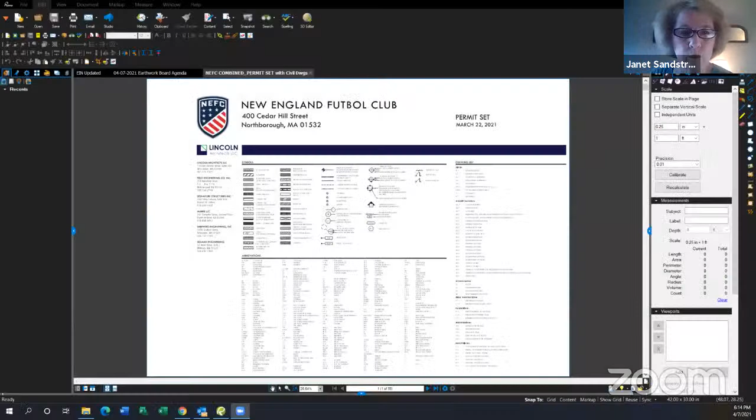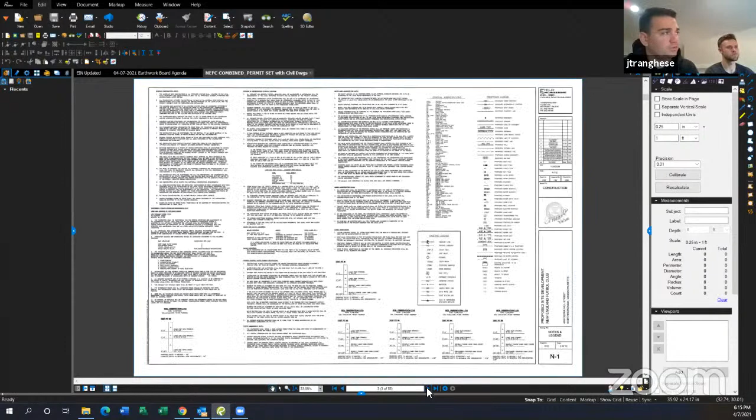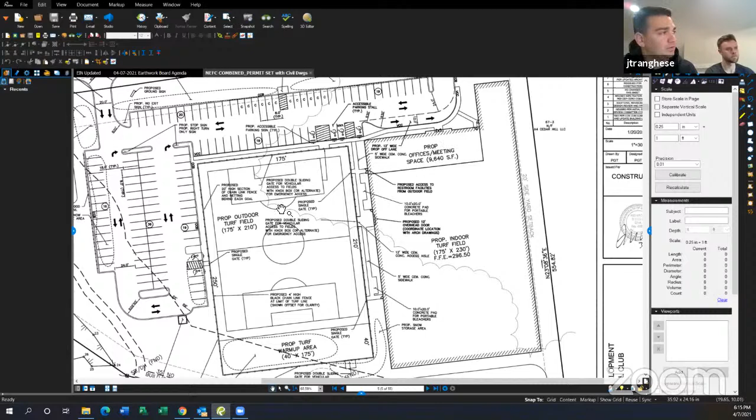Everyone see our screen? Yes. So this project is for the development of an approximately 55,000 square foot athletic facility. The building has a large fabric structure in this area. It has a conventional steel and concrete building at the entry that will host offices as well as meeting spaces. And then to the right of the project, so that would be Plan West, has a large outdoor field.

And then Plan North has a large parking space, both Plan North and Plan West. Where exactly is the building? This right here. Oh, okay. I was looking at the plans and I wasn't quite sure where it was. Okay, so this right here is the indoor field here. Oh, it's an indoor field. Yes, so it's a large fabric building, steel trusses with a fabric liner.

And then it has an accessory building on the front of it, a traditional steel metal framed concrete slab building that has the restrooms, some office spaces, as well as a couple meeting rooms inside. I'll flip to an architectural set to better help explain this. So this is the architectural floor plan. So here you can better see, this is the metal building at the very front. Page left would be the parking area.

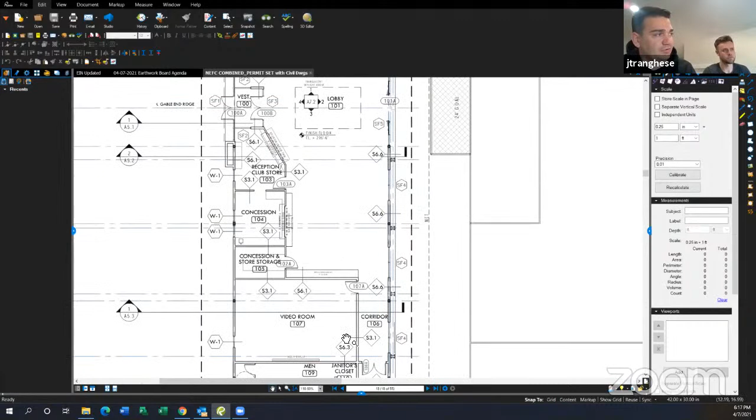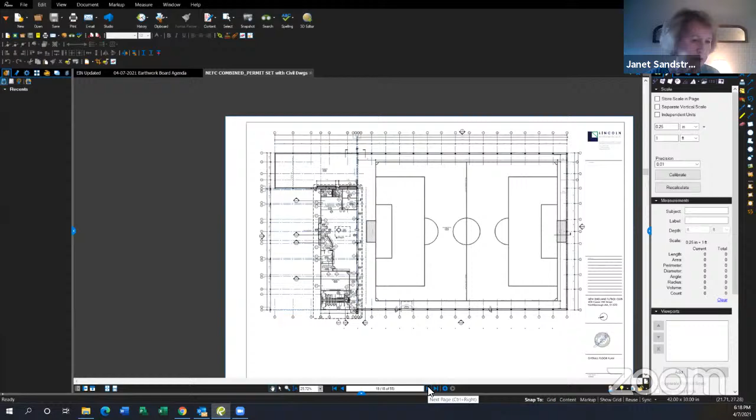So inside this area, there's a large lobby, some very small concession areas, video room, men's and women's room. And then you enter the field in the center of the building, and this is a large indoor turf soccer field. Wow, that's interesting. Now, what is your plans? How much dirt do you have to remove, and what's your excavating plan?

So we've put together a logistics plan that we can review. Give me one moment to pull that up. So this logistics plan has been developed off of the civil drawings. This is the project entry, the proposed project entry. Again, this is the field, this is the outdoor field. So we'll have a construction entrance set up here, the construction exit set up over here at the other proposed exit.

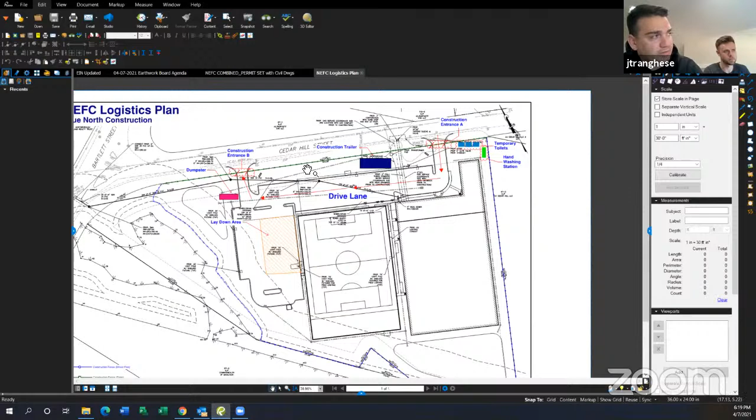Trucking will enter and exit through here. Cedar Hill Street is right off of 495. The entire front of the property will be protected from the public with panelized temporary fencing. The perimeter around the other three sides will be set up with driven 6-foot high chain link fencing. This is actually on site already. All of the erosion control has been established and has been signed off by Mia at the Conservation Commission.

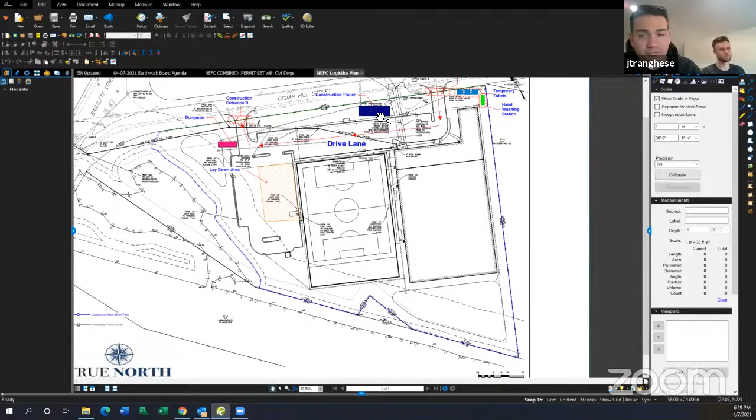This blue square represents our office trailer. We'll have some portable toilets and hand washing stations for COVID compliance here. And then to the far west of the site, we'll have a lay down area for concrete and steel erection, as well as just storing other building materials.

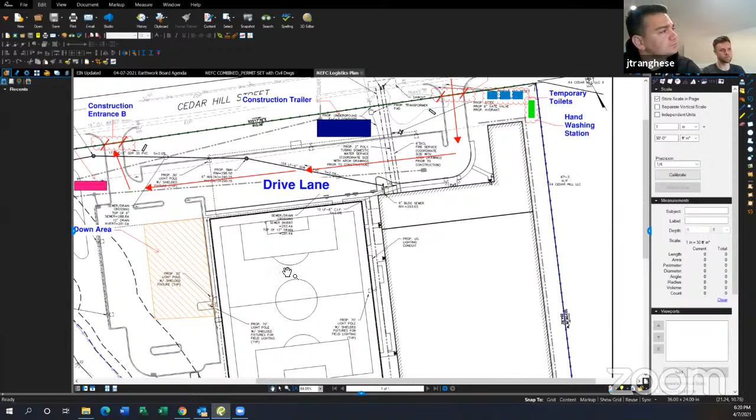Is that fence permanent or just for construction? Just for construction. There's no fence at the front of the site. There's only some fencing around the back of the site to help catch balls around this field.

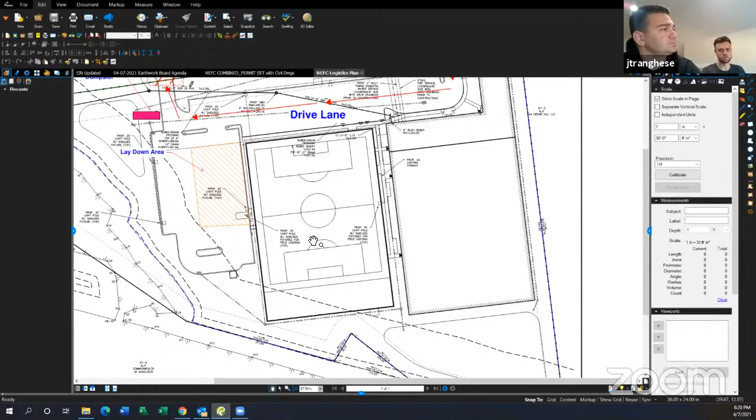How much dirt or gravel or whatever is there, are you going to be, what is it called, loamy sand? So there's approximately a 1 foot forest mat that's comprised of deteriorated wood.

Leaves, loam, and sand. The exact cubic yardage I don't know off the top of my head right now, but our plan is to go in. This is a largely forested site currently, so we'll remove trees necessary per this plan and remove the topsoil in specific areas.

This area here and this area here are large retention ponds, so we'll cut the site down, then we'll establish these erosion control ponds, and then progress with building excavation and foundation excavation.

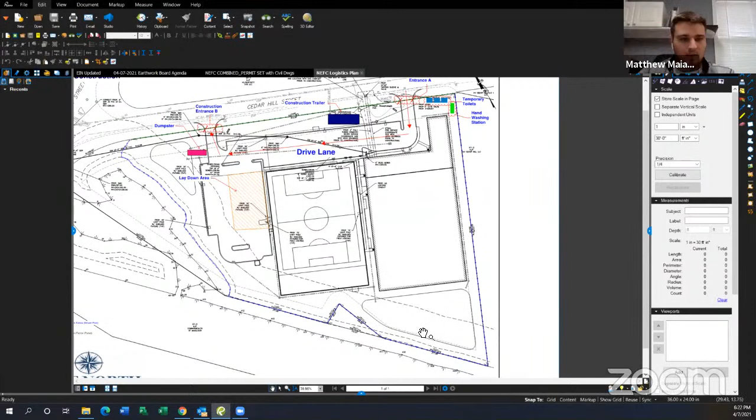Matt, do you happen to have the cut and fill analysis off the top of your head? Hi, this is Matt from Green Acres, the site contractor on the job. I was just trying to look back at what we did for our takeoff on that. Obviously this is an estimate because we don't know exactly what's there for material. We didn't have test pits and that information ahead of time.

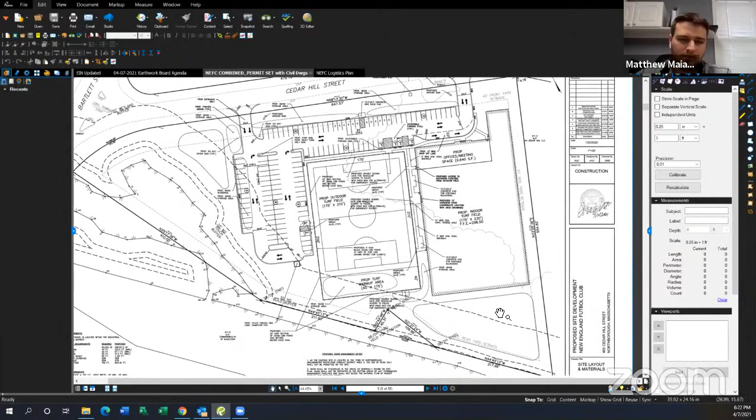I believe we plan on hauling 6 inches of topsoil over the entirety of the site, or the majority of the site anyway, so that was roughly 4,421 cubic yards. And then from the loamy sand area, we had planned on stripping 19 inches over 104,000 square feet, for another roughly 6,098 yards.

Again, those are estimates that were done for the bid, for the quote itself, so it's not necessarily 100% accurate. Until we get in and our layout guy is able to go in and shoot grades and do all that work, we won't know exactly what we're looking at.

Do you know, when you did test borings, what was the level of soil versus sand? I'd have to defer to James on that, we weren't involved in the test borings. It was approximately 1 foot of the forest mat, which contains the loam.

This will be a largely export project. So I just pulled up the erosion control plan. You can see here pretty clearly the property boundaries, and a very large percentage of this site is developed. I think this is just under 6 acres.

This entire area here will be cut down and then brought back up with structural fill, and a lot of the loam will be reused on site around these basins. There's a geotech wetland mix that goes back in the bottom of both of these retention ponds here. And then a lot of the loam that's in this area will be removed and then reused on site here.

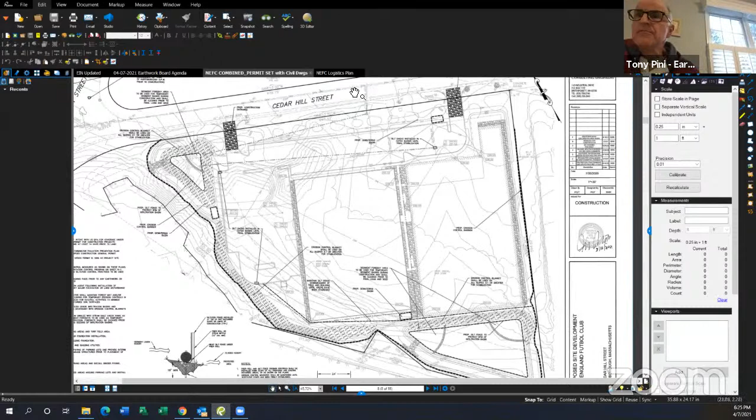Hey there, this is Tony Pini. Can you tell me just generally which way does the topography flow? Yes, absolutely. So this area along Cedar Hill Street is relatively flat. The existing conditions is relatively flat, and then it starts to taper off.

There's a large culvert in the back of the property here, I believe it's property of the MWRA. So about, I would say, 40 or 50 feet before that culvert, there's a gentle slope downward, an average of 10 feet, along this back southern portion of the site.

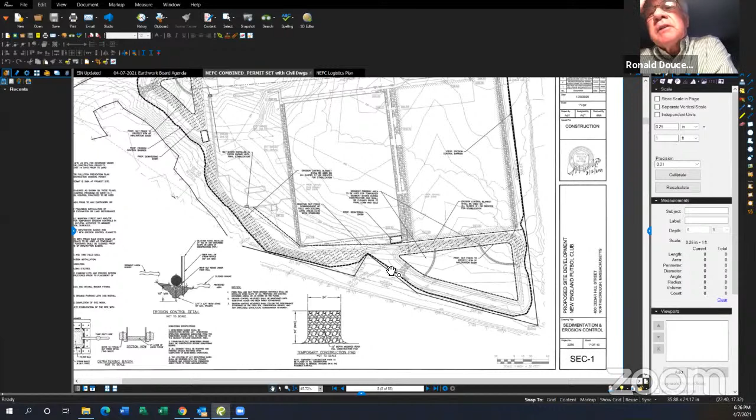So that detention pond is supposed to carry whatever excess comes off the high ground next door? No, the purpose of this retention pond is to catch storm water runoff from this building and divert it into this retention pond.

There's a stone drip strip along both perimeters of both the fields here that gets piped into this storm retention pond, and then this storm retention pond.

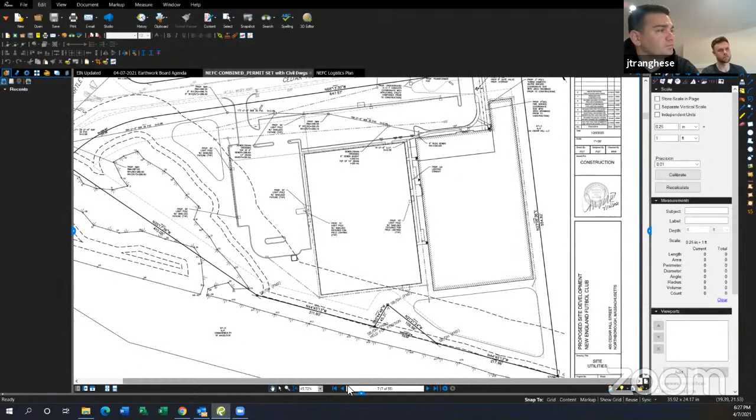Are there any more questions from the board? I'm all set, Janet. Ron? That looks good to me. Okay.

Do we have a bond amount? Yep, 1 second.

Let's see, I did do a bond amount and the total comes out to $28,500. It includes the stockpiling of the topsoil, and then if in the event that the applicant were to walk away, we'd have to hire a bulldozer to come in and spread that amount of topsoil, hydroseed the area. And then there's also the money that we always carry for the as-built plans. So the total, including the 15% contingency that we always charge, is $28,500.

Did you say 28? 28,500. Okay.

Just a question on how many trees are approximately there now and how many you plan to cut down? The whole 80% of the site is wooded. So it looked like there's about a two or three year growth in this area of the site, with trees with a 1 or 2 inch diameter in this area here, right throughout.

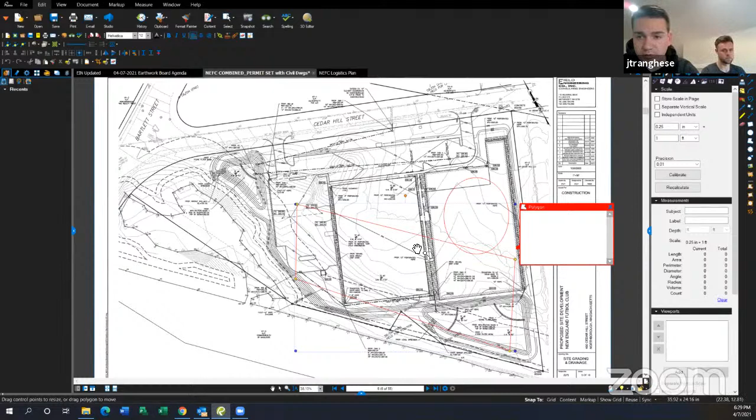This secondary area is truly forested. There's a bunch of large pine trees in that area. An exact number would be very difficult, but it's roughly 100. We've met with the DPW, the tree warden, and received his blessing on that.

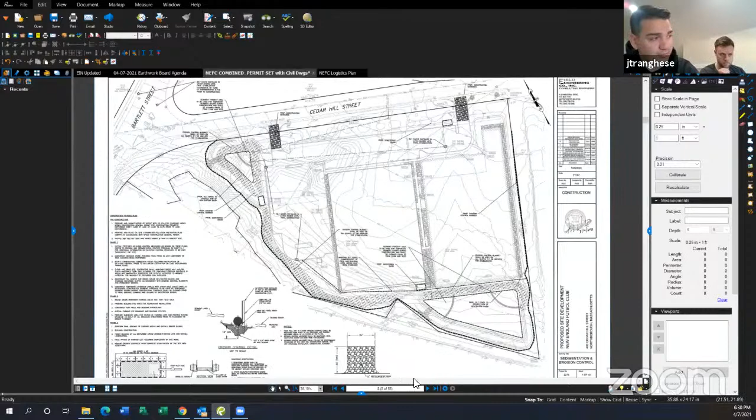So will there be any trees left when you finish, or are you going to plant your own trees? Both, a combination of both. Trees that are not needed to be removed in the public right of way have all been flagged to remain and will be protected. There's also a landscaping plan here that we can review.

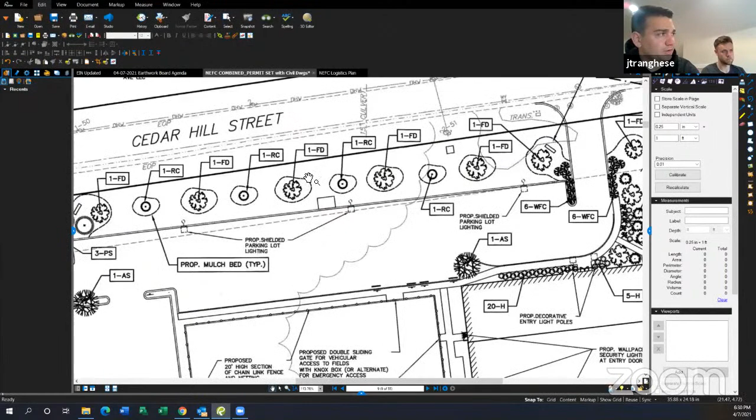So again, here's your entry, and then here's your other entry. There's a large amount of plantings that are going to occur along the street here, along Cedar Hill Street. There's some existing oak trees over in this corner, and then all down here that are to remain. There's also some other sporadic trees scheduled to be installed around the landscaping areas.

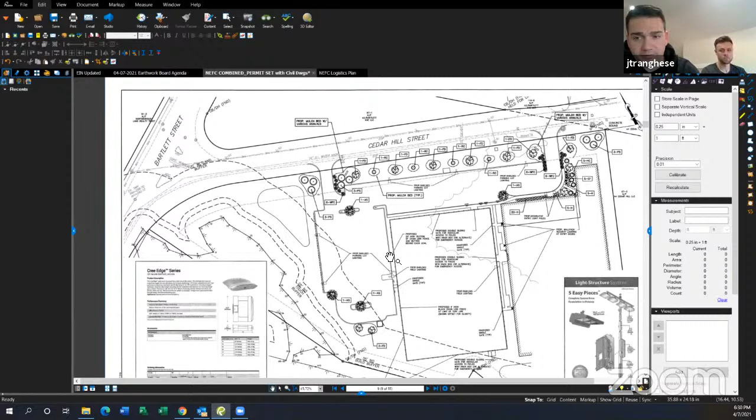I was just curious, how far is your exit that's closest to Bartlett Street? Because that's a pretty busy street there. Bartlett here, can do a quick dimension here, one moment.

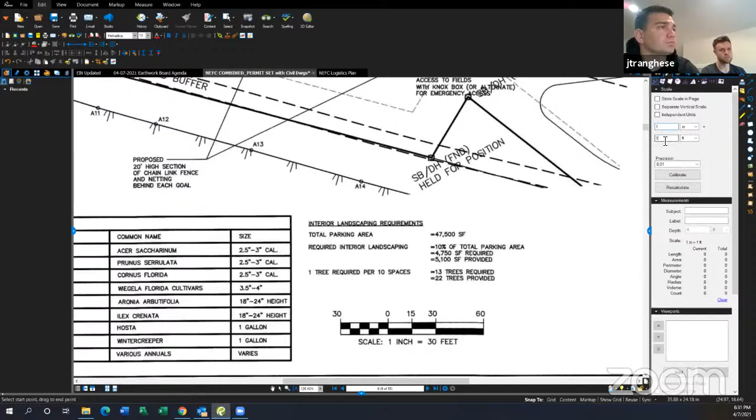Ron, just so you know, when this project went before the planning board, they were concerned about traffic queuing up in Cedar Hill Street, entering into the site during large tournaments. So they requested the driveway entrance be as far from Bartlett Street as possible, which is why the configuration is the way it is. Right now it's approximately 300 feet.

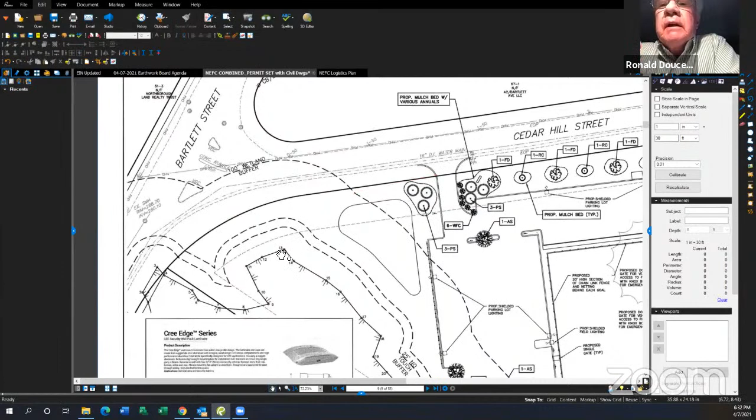I was wondering if the trees are going to remain on the corner there, and it's a busy road, and if they come out of that exit, the trees might block people either coming out of the parking lot or coming from Bartlett onto Cedar Hill Street.

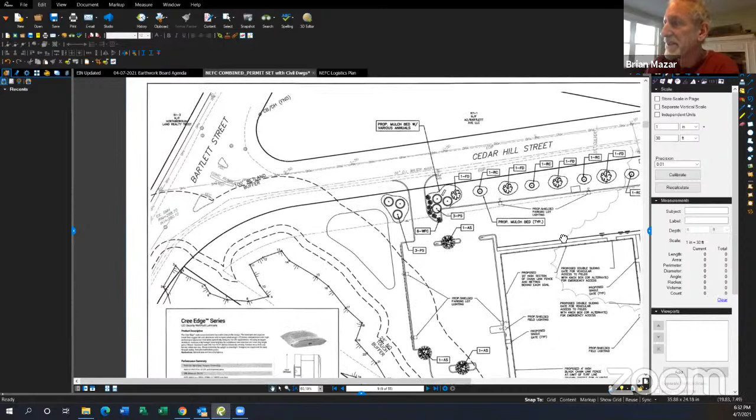Ron, we covered this with the planning board, but just to review here as well: most of the traffic that we'll be adding in that area is going to be on weekends and in the evenings. It won't be during the business day, so most of the additional traffic won't overlap with where you see that most of the traffic is, off hours primarily.

So this place won't be open at night? Yeah, it will, but most of the traffic will be from 6 at night till 9:30 at night.

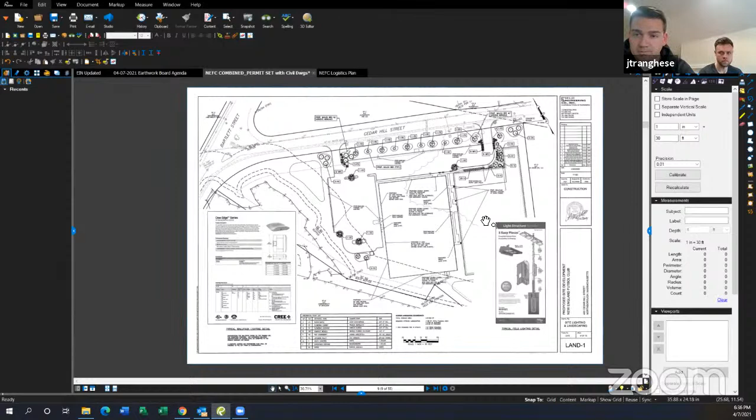If we go down the performance bond road, it's simply made out to the town of Northborough. It needs to be an insurance company that's allowed to do work here in Massachusetts. The performance bond can't expire, so it's not the bonding agency's obligation to just let it lapse if you don't pay them.

It has to be approved by the town before it can be closed out. Most likely it'll be in the form of a check. Most applicants do that, but the other option is a performance bond if you like. Understood, thank you very much.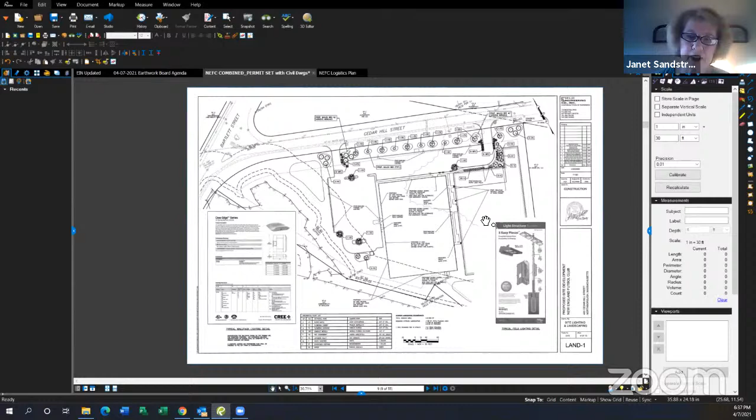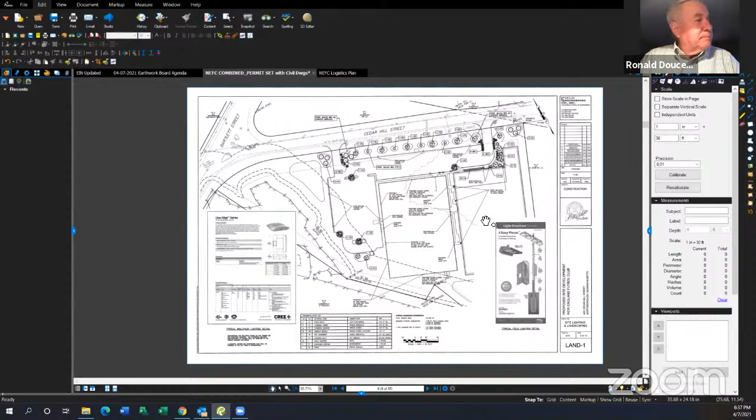Public participation part? I haven't seen any hands raised - Henry and Scott Rogers are on there, but I don't know. We haven't approved the minutes yet of last meeting, but we're done with the public hearing portion. I want to make sure the public had a chance to ask questions. There's two people out there as attendees, but neither has their hand raised, so I'm going to assume they don't have any questions and we're good to close the public hearing.